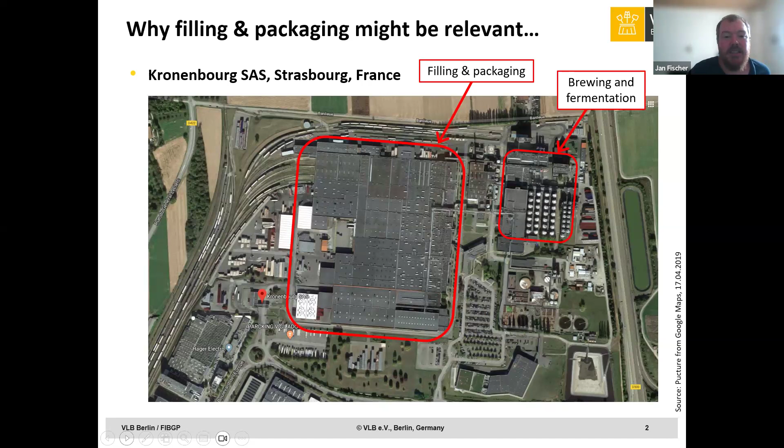Also, what we always say to make it more interesting for the brewer: filling and packaging is the part where you can screw up the beer, where you can turn a perfect brew from the brew house into a disgusting product. And this is, of course, something you should prevent. And this is why filling and packaging is also very relevant.

Okay, just some introduction. What is packaging? We have some definitions. So first of all, what is the function of packaging? Of course, the main point is that we have something to put the beverage in, something which encloses the beverage. This is the main function. But we also have some other very important functions of packaging.

For example, information, like legal information. What are the ingredients, the ABV, the alcohol, and maybe even things which are relevant for allergies and so on. This is also a very important function of the packaging.

Even some other things like gimmicks, some advertisement things. For example, I have these cans here of Coors Light, an American beer, where the mountain turns blue when it's cold enough to drink. If it's not cold, it is white. So you can even make some fun and some advertisement with the packaging.

So some other definitions: the packaging mean is the package itself, for example a bottle, a can, a keg, a cask, but also some secondary closures which don't really have product contact, such as a crate or cardboard boxes for six-pack trays and so on. This is the packaging mean.

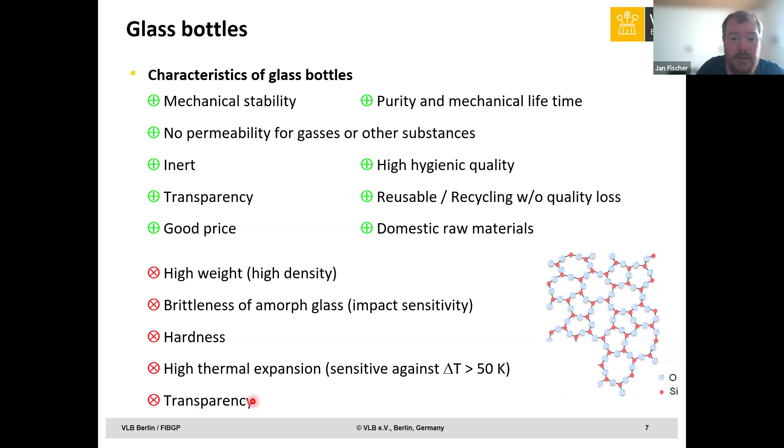Reusable, and recycling is possible if we don't refill them directly. They are cheap and can usually be made with domestic raw materials. However, they are heavy. They can break, since glass is very brittle. Then they are thermally sensitive to thermal shock: especially when cleaning and filling the bottle, we should avoid big temperature gaps. And transparency is good to see the product, but could also be bad, as we'll see later on.

I don't want to talk a lot about the manufacturing or the components of the glass, but just as information, most of it, like 2/3 or 3/4, is quartzite, so silicon oxide. Then we have sodium carbonate to reduce the melting temperature during manufacturing, and limestone to increase stability and durability. For the colors, we could use iron and sulfur for brown glass, chromium oxide for green, and cobalt for blue.

Here are the compositions of a glass bottle in weight percent, and as you see, most of that is quartz, silicon oxide.

Just quickly to the manufacturing of glass bottles. Basically, there are two main ways. The first one is the blow and blow process, an older process. The liquid glass gob goes into the mold, and then it is blown from the upside to get a pre-shape. Then the mold is turned, and afterwards it is blown from the top so the bottle gets its final shape. That's very simplified; I don't want to go deeply here.

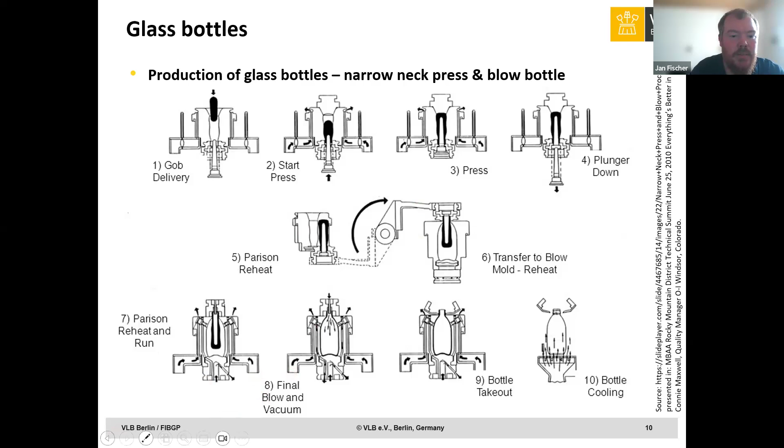So I press it inside with a mechanical thing, not by air, and then the rest of the process is the same. I turn it around and then blow it to the original shape. The main advantage of that narrow neck press and blow is that I have here in this part a much more even glass distribution.

As you see here, there are some gradients in the thickness of the glass, and this is then more likely to break. With this narrow neck press and blow, I can in the end have a smaller, thinner glass, and have some kind of lightweighting, so material optimization, and this was very important within the past years.

But the glass bottle is not only a glass bottle. We have some other things on it, and very important is the hot end coating and the cold end coating. The name comes from the container temperature while manufacturing them. For the hot end coating, the container still has a temperature of 500 to 700 centigrade, and the hot glass surface is vaporized with the fog of a metal.

For example, a tin coating or a titanium tetrachloride coating. This reduces the reactivity of the hot glass surfaces by creating a metal oxide layer. The thickness could be between 1 nanometer and 1 micrometer. Excessive coating is not very good; it can cause corrosion of crowns. I have a slide for this later.

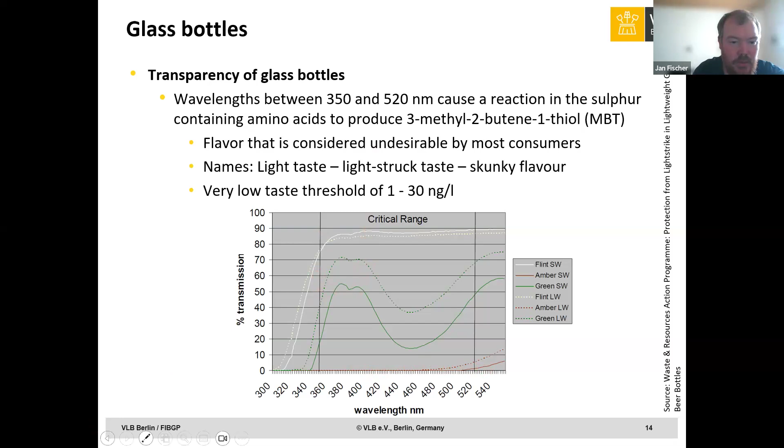If you see here, the amber, brown glass bottle does not let those light wavelengths inside the bottle, so that will not happen. But other bottles, such as white or green bottles, will allow that reaction. Brown bottles offer the highest protection, green bottles offer low protection, and transparent bottles offer almost no protection.

So if you ask yourself why there are still green and white bottles: first of all, if you are outside of Germany, you are not committed to the German purity law, so you can use special hops which prevent that reaction to some extent. And this is only possible if you have your own bottles, not pool bottles, so you can put UV blockers in the bottles to prevent that.

But if you have a pool bottle, like the returnable bottles every brewery uses, of course you should not use white bottles. Okay. It's interesting.

Can I ask you? It's interesting. Why don't you make a bottle that's completely black so you can't see anything inside? Why don't you do that?

Well, I think the coloring, for example for brown, was some iron, which is easily available and cheap. I think it maybe even exists completely black, but for this case it's not necessary. Of course, for marketing purposes, I can imagine a completely black bottle, but I think brown is totally sufficient to reduce this reaction, and it's easily available. We have a lot of brown bottles, and if you start now with a black bottle, it would be just for your brewery. But for marketing, maybe go for it.

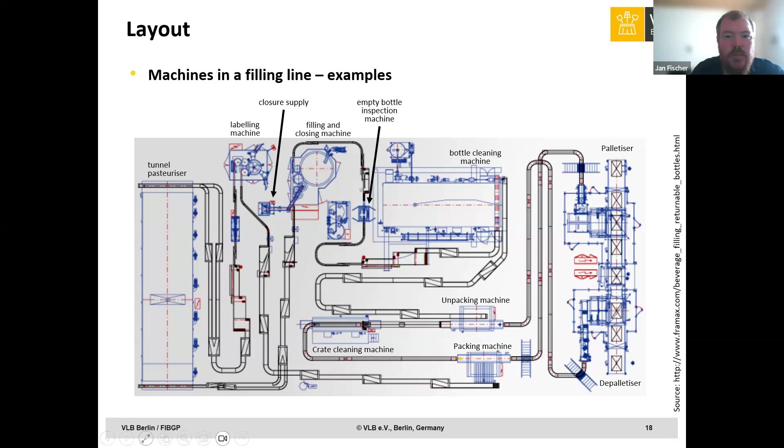So, I will now talk a bit more precisely about some of those machines. Okay, let's just start now with the transport.

This is like usually what you're having, the transportation of the bottles. I don't think I have to go into detail. You have those conveyor chains, and then of course you need an engine, a motor, and so on. You have the sidewalls, the guides, which are holding the bottles in the right position. Very important, what you cannot see here, usually you also have belt lubrication, where you put chemicals and water on those conveyors to have a frictionless transportation of the bottles.

So I already said that we have parts of the machine where the bottles are going in bulk transport, and also parts where the bottles are going in single file transport. For example, they enter the washing machine in bulk transport, but then for the inspection machine and the filling machine, they need to be in single file.

And it's nowadays standard that you have the separation process done pressure free. With that, Krones calls it a glide liner, though other companies have other words for that. You see here that when the bottles are in bulk transport, you need less speed of the conveyors to have the same amount of bottles than when it's single file. So I have increasing velocities of those conveyors, and this is how I achieve that pressure-free single file transport.

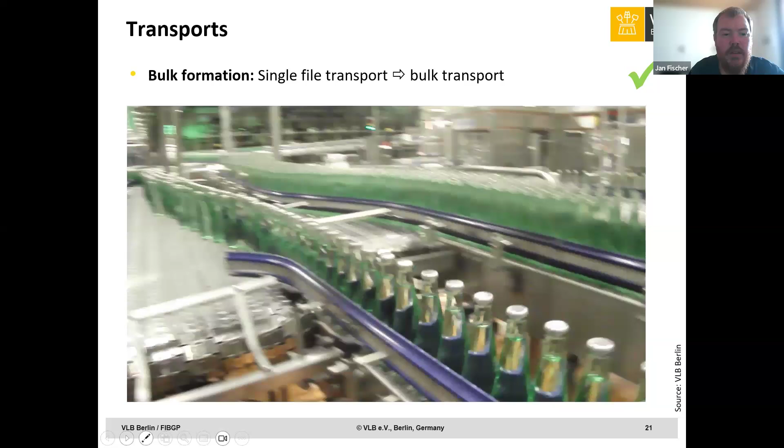Okay, now something about efficiency and output. If I have the filling machine, the filling machine is determining the output of the filling line. If I have a filling machine which, for example, fills 20,000 bottles per hour, the filling line produces 20,000 bottles per hour. We already talked briefly about all those machines. If these machines would run without a stop and all at the same speed, the full filling line would be full of bottles.

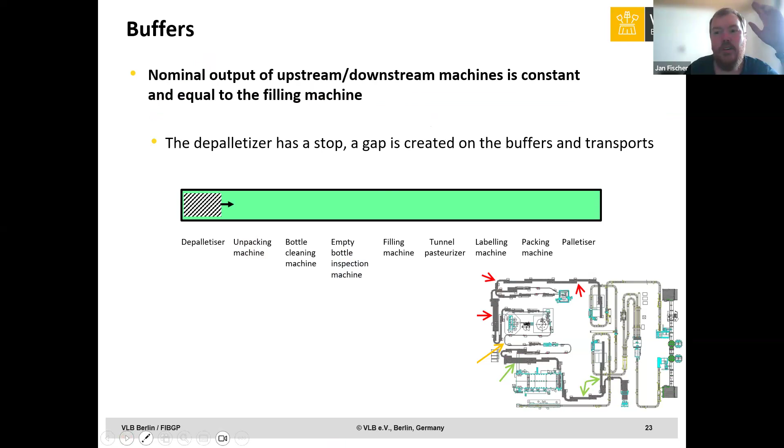So if I now have a stop at one machine - there are a lot of things turning, there's always some interference, there's always some stop. If I have a stop at the depalletizer, and we assume every machine runs at the same speed and is full of bottles, that stop will then go to the unpacking machine. Afterwards I would have a gap of bottles at the bottle cleaning machine, at the empty bottle inspection machine, and then at the filling machine. And if I have a gap of bottles at the filling machine, then I will not be able to fill my 20,000 bottles per hour. This is why the efficiency of the filling line goes down.

Afterwards, the stop or this gap goes to the other machines. This is why you get the output of your filling line according to that V diagram, also called a Berg diagram. The filling line is the leading machine.

Which runs with a nominal speed, in our example 20,000 bottles per hour. And then all machines, upstream or downstream, run with a higher nominal output, up to 150%, between 130 and 150%, for example at the depalletizer.

Through that extra higher output, in the same example, if there's a stop at the depalletizer, so I don't produce bottles there, but due to that higher output, I can, with each machine, reduce that gap of bottles. In the end, the filling machine won't see anything of that stop, because all machines are working faster. This way I'm still able to fill at 20,000 bottles per hour, so I don't have a stop, and my efficiency doesn't go down.

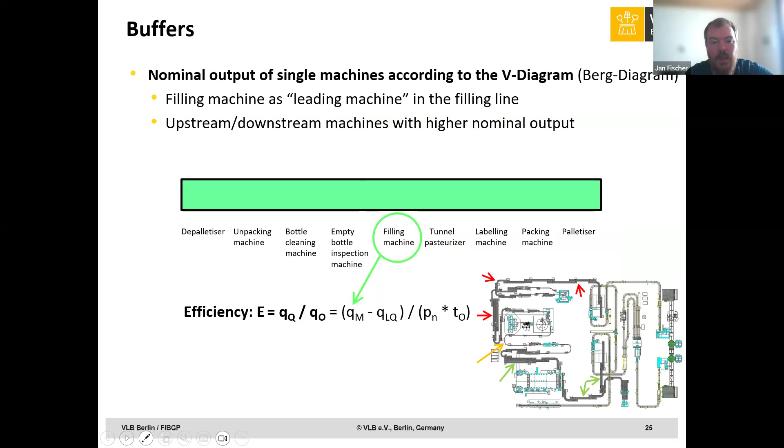So this is a very basic way of how filling lines produce. I have the filling line as the leading machine, which determines the output for the other machines.

To also achieve that the filling machine always runs, I need buffers. I have to ensure that the filling machine always has enough bottles to fill, and that there's always enough space to transport the filled bottles. So we have the anti-stau bottle buffers before the filling machine, and they are always filled because the machine always needs bottles. This is the anti-stau buffer.

Then the anti-block buffer is after the filling machine, and it should always be empty. If the anti-stau buffers are empty or the anti-block buffers are full, the filling machine has to stop, because it either doesn't have bottles or can't transport the bottles away. So these are the buffers. You see there's always some buffer space in those filling lines - here always filled, and here always empty, the anti-stau buffers.

Okay, then the first big machine, the bottle cleaning machine. Yes, of course very important for a returnable filling line.

Initial situations and aims of cleaning. We can imagine when the bottle comes in, we have product residues, we have some microorganisms inside, maybe even mold if it's been standing. The bottle still has labels, and if it has labels, it still has label glue. There can be foil inside, there can be dust inside, but there can be everything inside - like glass splinters, crown caps, cigarette stubs, and whatever. This is, of course, something which has to be removed from the bottle.

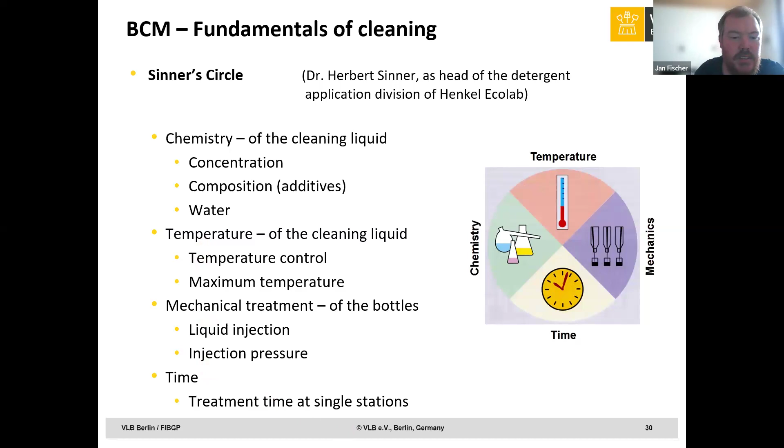There are some advantages and disadvantages. For example, the main advantage of the double-end machine is that you have a more hygienic way. The risk of recontamination is less because you don't have the dirty and the clean bottles on the same side. In some breweries, it's even made like that: the infeed of the bottles is at a different place of the building than the outlet. There's a wall, and then I can divide the dry part from the wet part of the filling. Very good.

However, they need more space. They are more expensive than the single-end machines. The entire treatment is also a bit longer. We have here 15 to 25 minutes and a soaking time in the main caustic of 10 minutes. And the single-end machines are more compact. So they don't need as much space, and have a short soaking time of 6 to 8 minutes, entire treatment 11 to 13 minutes. So also due to that compact design, I can work a bit faster with them.

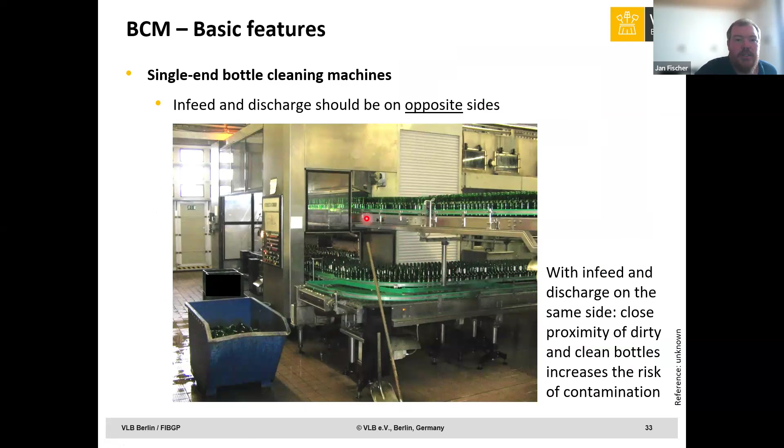But as said, there's a hygienic risk. So you really have to see that it's not so close. And also very important is that the dirty bottles are always down and the clean bottles are leaving the machine from the upside. Otherwise, of course, dirt could fall into the bottle. But if you have a good hygienic concept, of course, you can also work very well with single-end cleaning machines.

Inside the machine, the bottles are located in baskets, usually made of plastic, but there also exist some made of metal. Those baskets, with one bottle always inside, are on the conveyor. The baskets are important for the uptake and the transport, and also later for the release of the bottles. Also important is that the bottles are centered. You see here that the bottle opening, the bottle finish, is always centered in the middle of those conveyors. This is important for flushing and spraying, and also later for the label removal.

What's also important for those conveyors, for those baskets, is that I don't want a lot of caustic carryover, because this will increase the consumption if I carry caustic from one bath to the other bath with those layers. So this should be minimized. Also low heat capacity, because if they take and transport a lot of heat, this would also reduce my efficiency.

Okay, let's go now to the different steps of the bottle cleaning machine. We start here with number 1, the infeed. After the infeed, we have the pre-soaking bath number 1 and the pre-soaking bath number 2. The infeed, of course, is to get the bottles into the machine. The pre-soaking, the first step of the bottle cleaning machine, has 2 main effects. First of all, I already have some kind of cleaning; maybe some objects fall out and so on. But also very important is that I have a heating up of the bottles. The first is about 20 to 30 degrees, and the next one is up to 40 degrees. So I have a stepwise increase of the temperature, so that later when the bottles go to the 80-degree caustic, they don't have such a big temperature shock.

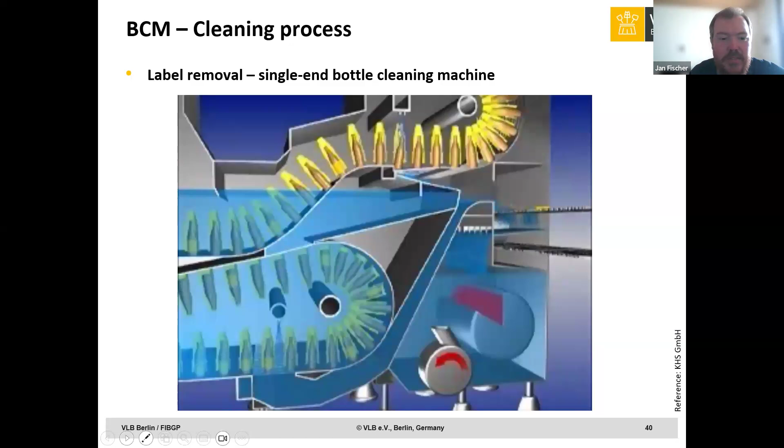Is there any circulation inside the bottles, or it's just soaking? Inside the bottles right now, no. This is just soaking. We have the circulation of the caustic due to the label removal and also for homogenization effects. But inside the bottle, in this moment they are just filled with the hot caustic. But we will have something later. Okay, and this is the heat exchanger, for example, to heat the caustic. So here we put the primary energy.

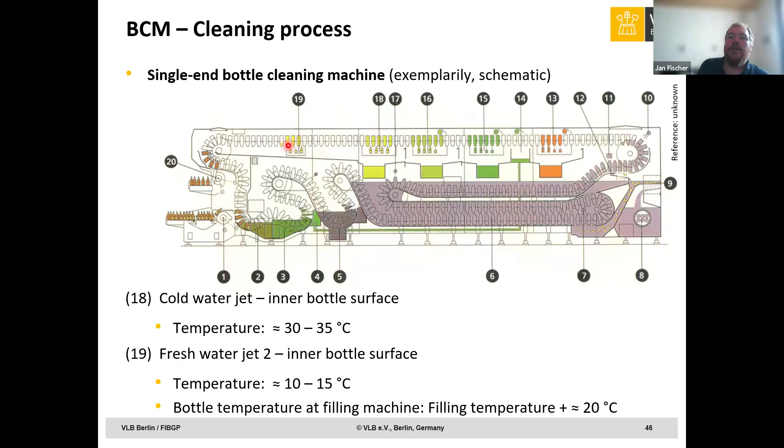The fresh water is very important because this water is the main thing to get out the chemicals, and then to bring the bottle to a temperature of 20 degrees when it reaches the filling machine, because I fill very cold, and if the bottle were too hot, I would have excessive bottle burst at the filling machine. Yes, and this water has to be of drinking water quality. Sometimes you can even add some disinfectants, such as chlorine dioxide and so on, but of course only in the amount that is within the legal regulations.

Okay. Then in the end, the bottle discharge, which is of course done with those machines which are putting the bottles from the conveyors into the baskets and vice versa.

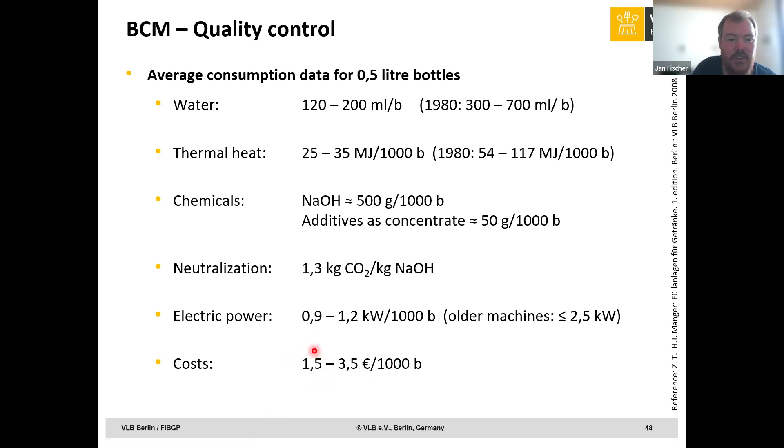You see here in the end it says 1.5 to 3.5 euros per 1,000 bottles. But I would not say that this is a number we can trust anymore, because we all know what happened within the last years: we had an explosion in thermal heat costs and also in caustic, which was increasing a lot. So we should maybe make new studies to present more recent data. But here it's still between 1.5 euros and 3.5 euros, still a big gap, but I think it's more like in this range now.

However, here are some things to be considered. Of course, you are quite limited in the output. If it's too fast, you don't see anything. Anyway, I think it's not state of the art now. Of course, the change interval for personnel is 20 to 30 minutes, if it's done right. I don't know if this is always taken into account when you are in a market where there is an inspector.

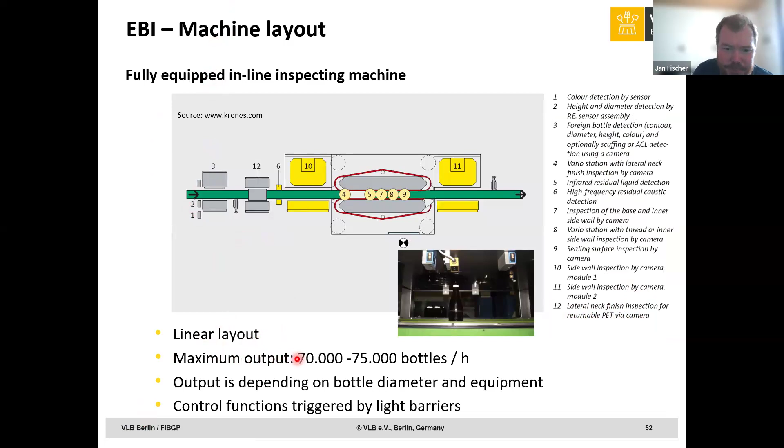You have inline full inspection machines. Here is a sketch of it, this is the linear layout in this case, and we have a maximum output of 70 to 75,000 bottles per hour. Here are some pictures of those machines from Krones and Heuft. These are, I think, now the world leading manufacturers of inspection machines.

And they have different functions. First of all, the contour and color detection. Normally these machines have different techniques. In one machine, we have different modules which are responsible for different tasks. For contour and color detection, a picture is made of the bottle, and then it's compared to a template to see if there's a difference. Or for color, they have a color scheme. If it's different, then a signal is sent to the machine that this bottle is not right.

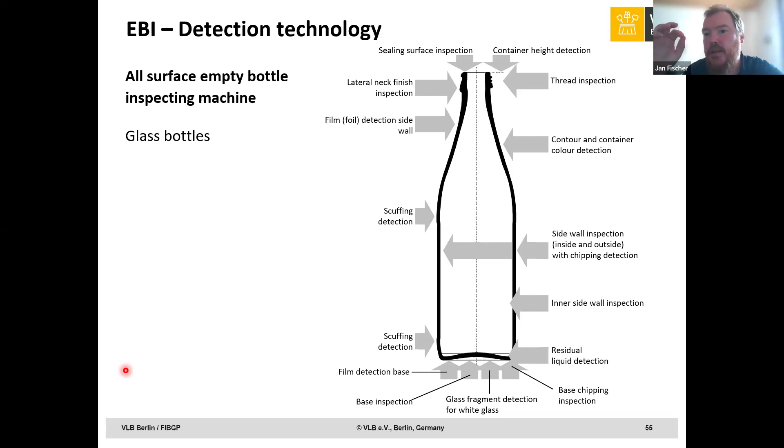So these machines can now find dirt the size of 1 by 1 millimeter, and still are able to separate it from a drop of water, which could also, of course, be on the bottle during production. So these machines are quite advanced nowadays. This works with CCD cameras with optical filters which take the pictures, and then they are compared to the template by the software, so we see where there might be things which don't belong on the bottle.

Bottle blower, yes. Before I inspect the bottle, I somehow have to clean the lubricant so that I have a proper view on the bottle. Okay. Yes, these were the empty bottle inspection machines.

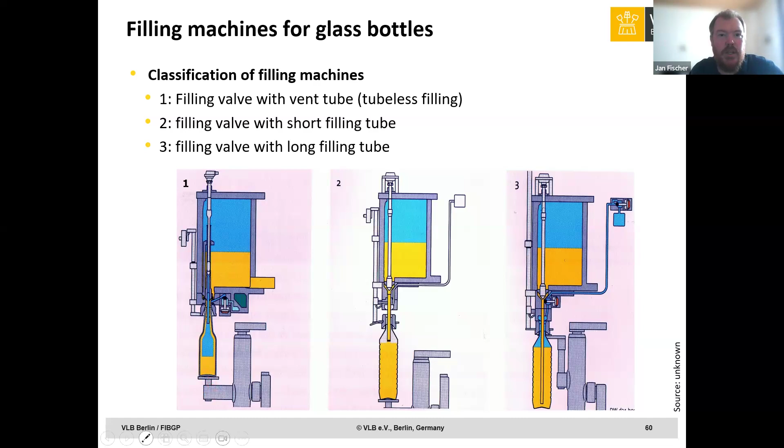Okay. Objectives of filling. What are the objectives of filling? I think most obvious is getting beer from the tank or wherever into a container, for example a bottle or a can. This is why we are doing all that stuff.

There are challenges. I have beer which is foaming, and I want to fill it very quickly. The filling process has to be done within a few seconds. This is why I have to fill with a pressure, to prevent foaming and to be able to fill that fast.

The filling pressure has to be slightly above the saturation pressure of the beverage, so 0.5 to 1.5 bar higher. The saturation pressure depends on the CO2 in the product. This is something I don't want to change, it's a product given. I want my beer with a certain amount of CO2.

But for example, the temperature I can change. This is why we fill with low temperature, because then the saturation pressure is low, and this is why we can have the lower filling pressure.

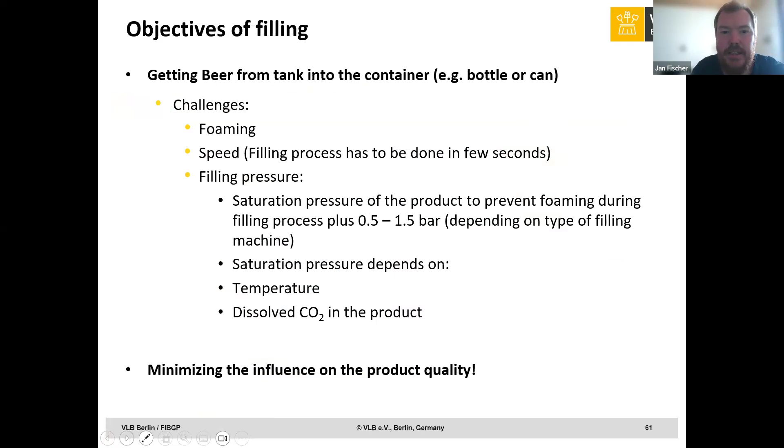Also, one very important objective of filling is to minimize the influence on the product quality. Maybe you already know the main influence on product quality - of course, it is oxygen. We'll talk about this more later, but it's one of the most important things with filling. After getting the beer into the bottle, the goal is getting the beer into the bottle with a low oxygen uptake.

Afterwards, there's a pressurization - I put the bottle into the filling pressure, which is slightly above the saturation pressure, and then I have my filling phase. After filling, I have the pressure release, and afterwards the bottles are going out, and I can crown and have the bottled beer.

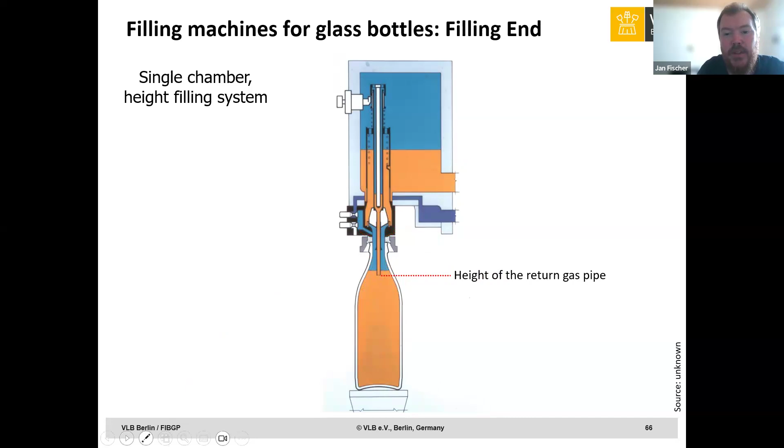And the gas is pushed back into here. The height of that return gas pipe, where the air is pushed back, is very important, because this is also here the filling end. When some level is reached here, which is determined there, that determines the end of the filling. So, the final filling height is defined by the height of the return gas pipe.

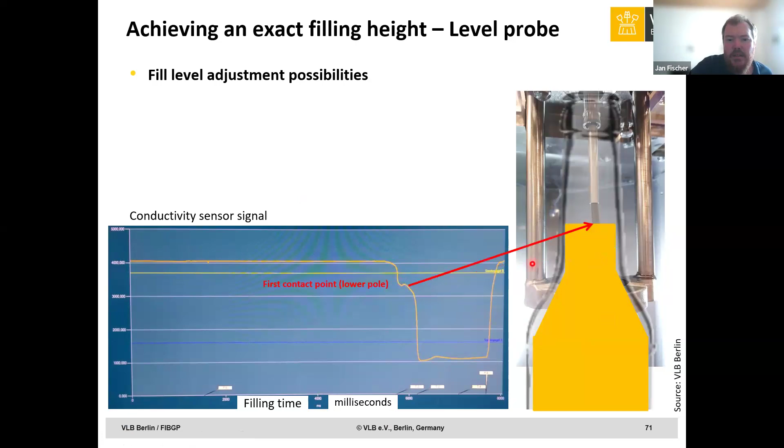Once this point is reached, the beer is here, we have the conductivity going down. We have a small shortcut, and then here nothing changed because we have some insulation material. But in the end, when we reach this, we know we are at the very end, and we stop the filling process. With these steps, we can adjust the filling height.

So the filling process we know, and now it's almost the end. Usually the filling speed is slowed down a bit, and afterwards we have those things, and with that we can handle and steer the filled height. This is the height filling machine.

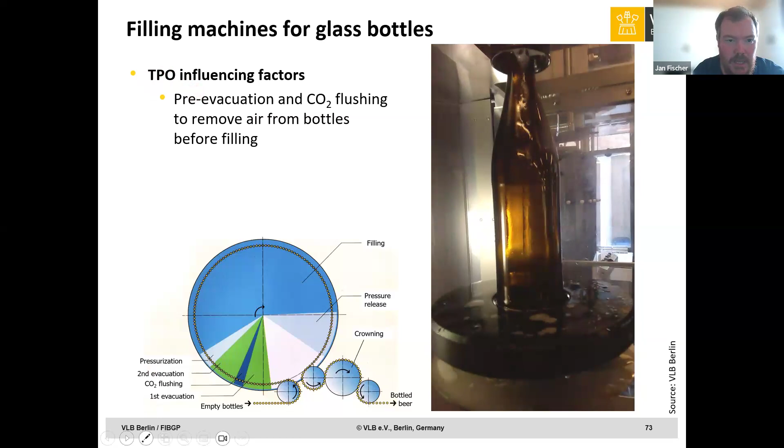Here it already says TPO influencing factor. TPO means total package oxygen, and this is the most important factor concerning oxygen in this case. So oxygen, and especially the TPO, the influence of oxygen in bottled beer. Oxygen, of course, reduces the shelf life, leads to off flavors and color change, and so on. Some other teacher already told you that.

And the TPO, that total package oxygen, is actually the sum of the oxygen load of the beer at the filler inlet - maybe the oxygen that comes in with filtration and so on - and then the oxygen uptake during filling, and the remaining oxygen in the headspace of the bottle.

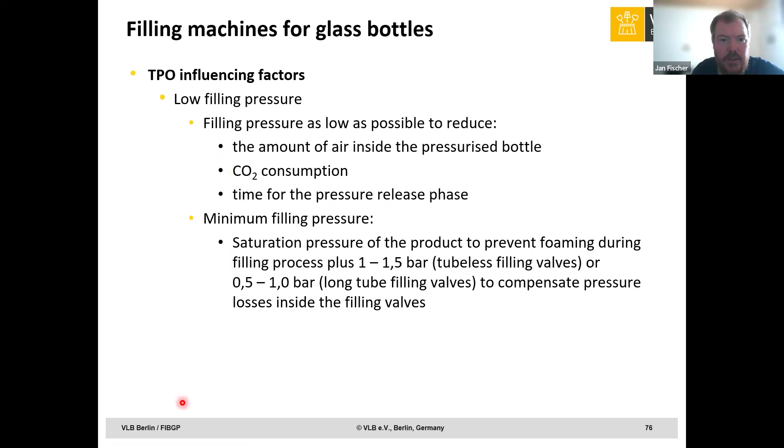So low filling pressure, as low as possible, yes, because of the amount of air inside the pressurized bottle, CO2 consumption, and the time for the pressure release phase. Minimum filling pressure, we were talking about it.

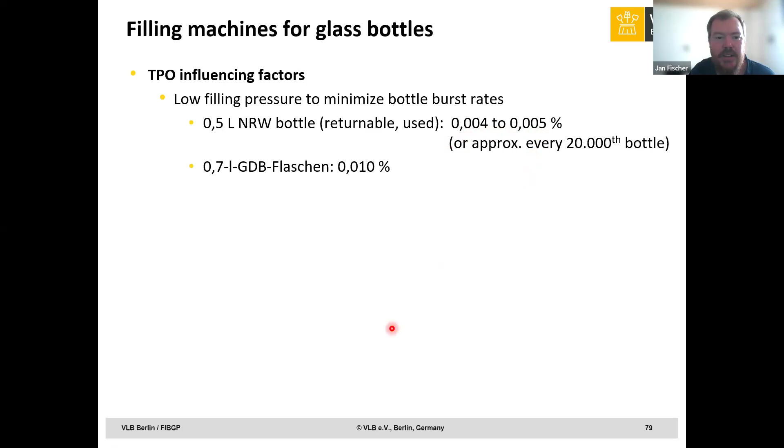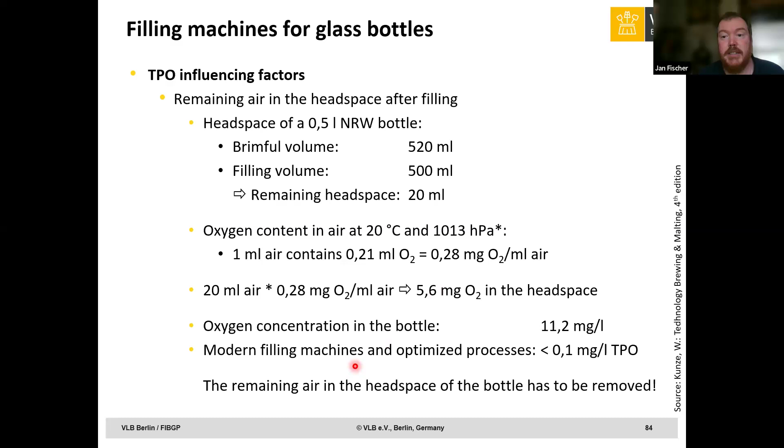And when we said we are at around 0.1 milligrams per liter, which is achievable nowadays, we are then a factor 100 more than required, meaning the remaining air in the headspace of the bottle has to be removed. And this we do with the high pressure injection. This is, as I said, one of the most important gadgets. And we see it here. This is a high pressure injection.

We are jetting sterile and oxygen-free water inside the bottle. Sterile and oxygen-free by means of just heating it. So we put the hot water, around 80 degrees, in the bottle, and due to that we create an overfoaming of the bottle, and therefore the oxygen is pushed out, and then we have to cap, of course, at the right moment. You see here a small head, like a cap of foam, and then we put the crown on, and therefore we can push out the air in the headspace.

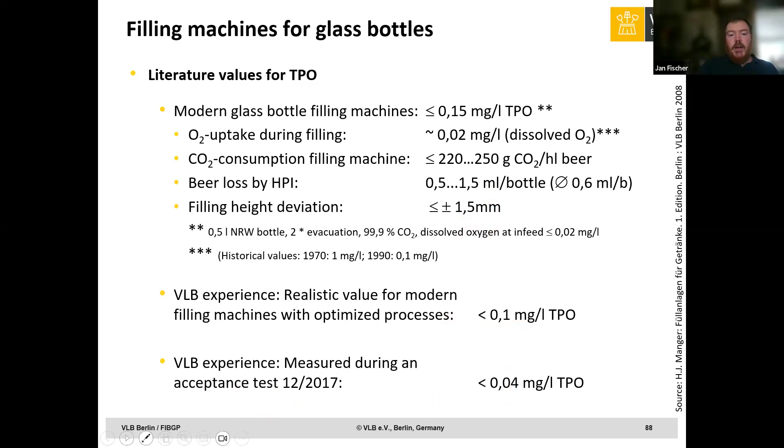What we say is realistic is under 100 ppb, but we already saw, for example in an acceptance test, that we can have values below 40 ppb. Very important to control the TPO is that you measure it right. I think even the smallest brewery should be able to measure the TPO in their products. There are machines especially for that, for example from Anton Paar, the TPO 5000, which costs more than 50,000 euros. Of course, this is not acceptable for everybody.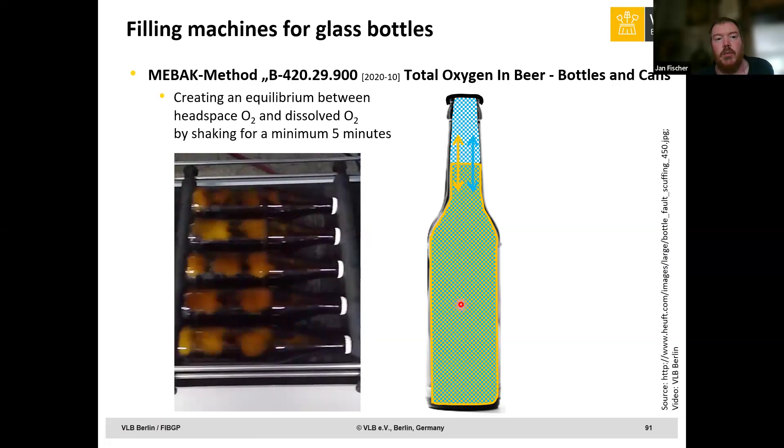That was not removed properly by the HPI. What we are now doing, we are shaking the bottles and then achieving an equilibrium between those things. So the oxygen in the headspace and the dissolved oxygen are getting into equilibrium. You see here, we shake before for 5 minutes.

And to now calculate the TPO, what do we need? We need now the oxygen dissolved in the beverage that we can measure with a Haffmans, with the machine if we have that piercing device. What we also need is the temperature of the beverage. It's given in the measurement devices usually, the filling volume, and the headspace volume. And these are some things we can find out by metering, for example, by just weighing the bottle and then calculate by the density.

And then we need the ratio between the filling volume and the headspace. And then with this information, we can calculate the factor Z. And the factor Z we multiply with the oxygen we measured, and this is how we can get the TPO. Okay, so we have to shake the bottle, measure the oxygen, and then make those calculations.

Here are some stepwise SOPs, some stepwise instructions how to make it. For example, we have it here for glass bottles, for cans, and also for swing top bottles. I think we don't have to now go through everything in detail, but this is for you. You have all those things if you want to know how to make it properly.

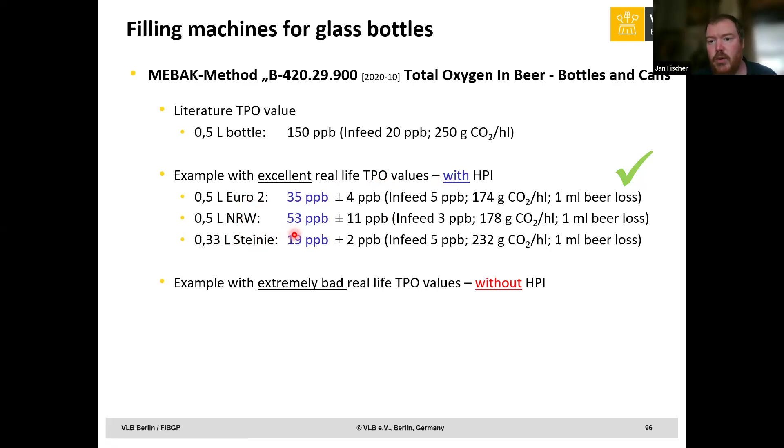We have here, I think, the last year that we did it, we made some research, some investigations, and had here some values we found out with excellent real life TPO values with an HPI, and here are some bottle types. And then we were here between 50 and 20 ppb, very good, very much below that 100 we are saying. And then for some other things, we checked the values without using the HPI. And you see here, we were like factor 1000 without that HPI.

So seeing it is 1000, no, 200, doesn't matter. Much higher without the HPI. So it is very crucial to have the HPI when filling bottles.

Okay, now we had the glass bottle filling machines, and now we are leaving that machine and the next machine right next to it is a closing machine.

So usually blocked. We saw that already, that they have to be quite close to the filling machine, because we want to use that over-foaming and have to close them.

Just some words now to the crown corks. Usually nowadays we have here some coating, for example, chromium oxide steel. Thickness: we are going now to somehow reduce the weight. So nowadays we can see there is that standard of 0.235 millimeters of thickness. We have a lacquering, we have a printing, and we have that compound.

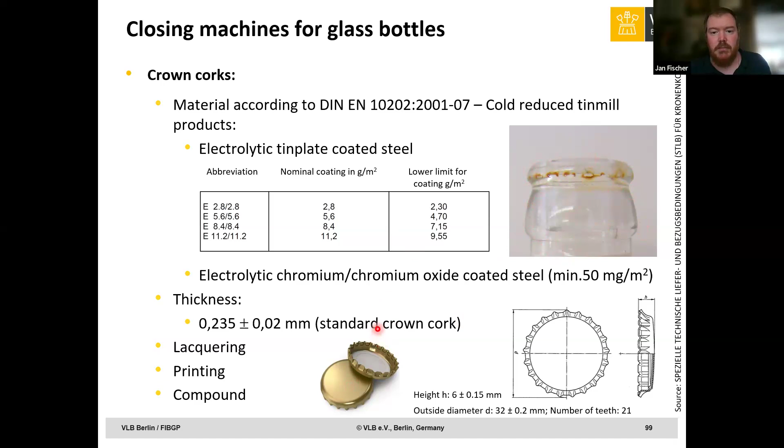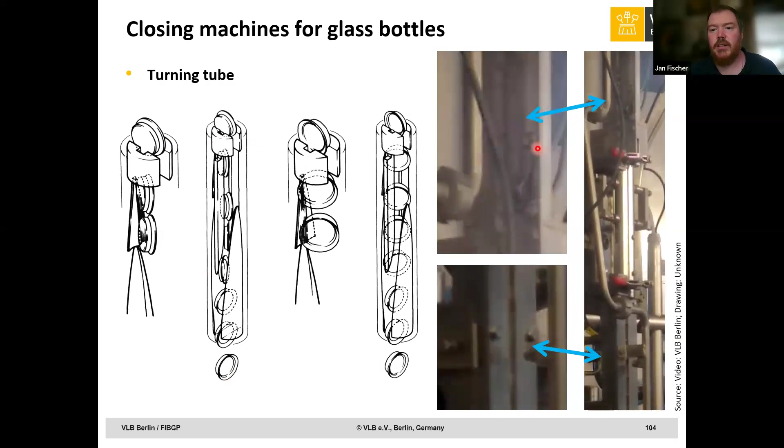So anyway, it is just mechanical. You see here those slots, and then the crown falls, and however it comes here, it has to be turned, and in the end, doesn't matter which side it comes from, it makes a turn and will always be in the right direction. It's not easy to see in those videos, but I think you can imagine that it's done mechanically so that the crowns are all in the right direction.

Yeah. It's not rocket science. Actually, it's a machine like, yes, you can imagine it. I don't know if you know those hand corkers, and it's basically the same.

Okay, here you see, it's easy to imagine, I think, the preload of the crown corking, and then we have that closing ring with a defined diameter, also according to the bottle and the crown itself, but usually it's standardized so that you have all the same diameters. And of course, you need a special force, somewhere between 1.8 and 2.5 kN, so that it is tight enough but not too tight, because if something is too tight, then it is destroying.

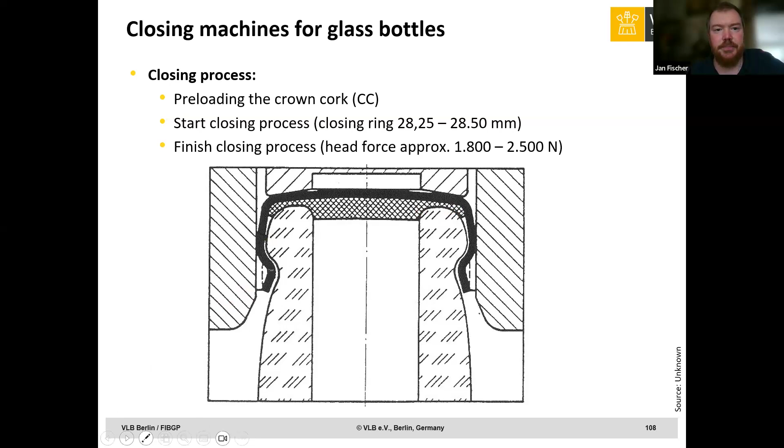Yes, then next thing is the bottle shower and drying stations. You remember those videos with the HPI, the foaming of the bottles? Of course, the bottles then are full of beer on the outside. This has to be removed. And then afterwards it is removed, and then usually you have a bottle dryer also, so that the bottles are afterwards dried, maybe in this case to be able to be labeled if there's no pasteurizer in between here. But it's a very simple machine, that bottle shower.

Actually, we have a lot of similarities, but also some differences when comparing the canning and the bottling. Usually the can lines are not more simple, but more compact. Just imagine you don't need that big bottle cleaning machine. You don't have a lot of transport of empty bottles in crates. So this is why they can often be more compact with fewer machines. However, they can have much higher output.

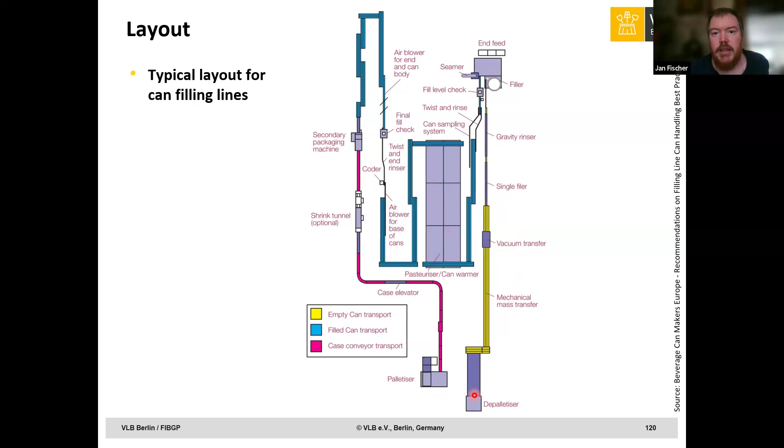What is very often the case is that we have two height levels in the can filling line. We will see this case later. Until here is on a higher level than the filler. This has different reasons. Starting with the depalletizer, you see here the pallet of cans is very highly packed. So usually when I depalletize them, I think we have a video of it.

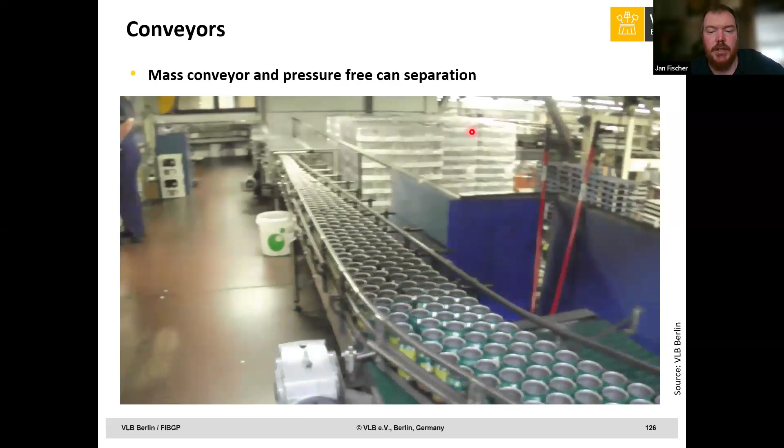Of course, they are not as heavy, we don't need so much force, but we should by any means avoid massive denting of the cans, because this could later lead to corrosion because of material cracks and so on. Okay, but you see the pallets of cans are quite high, and then they come on that high level from the depalletizer and go from bulk transport into single transport with that separation.

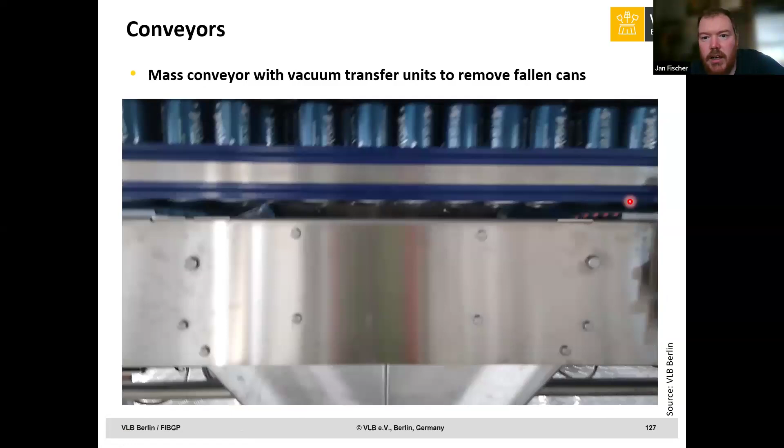Then we had also in that sketch a vacuum transfer. So here the cans are not transferred with a conveyor, they are transferred by vacuum on the upside. You see, they are somehow not flying, but there's a vacuum, and they are transported until they are getting down here again. For a small moment, they are transported like this.

And you see here, I don't know if you see down. Here they are lifting up, and then here's a vacuum transport, and down after the vacuum transport, you see here that bin. If I have a fallen can on the line, it would not be lifted up, so it will fall down. This machine is therefore to remove the cans which were falling, so that I don't have interference with cans which are falling down. This is made by this vacuum transport, which is usually in each canning line.

Then the can inspection machine. Of course it's not like with an empty bottle inspection machine for returnable bottles, where we have very dirty bottles and can expect everything. We have the cans coming from the manufacturer, and they already have some inspection machines. However, there are also some inspection machines for cans.

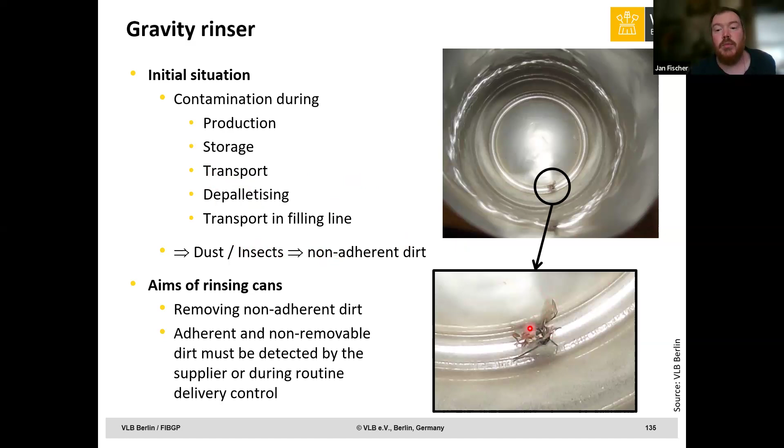So then the rinser. As I already said, the cans come from the supplier more or less clean. It's not like a dirty bottle coming from the customer. However, due to production, storage, transport, depalletizing, and transport in the filling line, we could have some contaminations. We don't talk about adherent dirt. We talk, for example, about dust, or in this case here, some insects. And this should be removed from the can.

And of course, we don't do that like a bottle cleaning machine. Therefore, we have a rinsing machine. The aim of rinsing cans is to remove the non-adherent dirt. Adherent and non-removable dirt must be detected in the manufacturing by the supplier of the cans. This is not the responsibility of the brewery. We call those gravity rinsers, and you see we have here one level, and here we go to the ground level, and this is the rinsing where we are cleaning the cans.

You see here, these are those twisters. Imagine the can goes into these things, like a roller coaster or those things for astronauts, where the can is rotated in the beginning to 135 degrees, and then has a drop angle of 35 degrees. So we have some cleaning effect due to gravity. Some of the dirt would already be falling down.

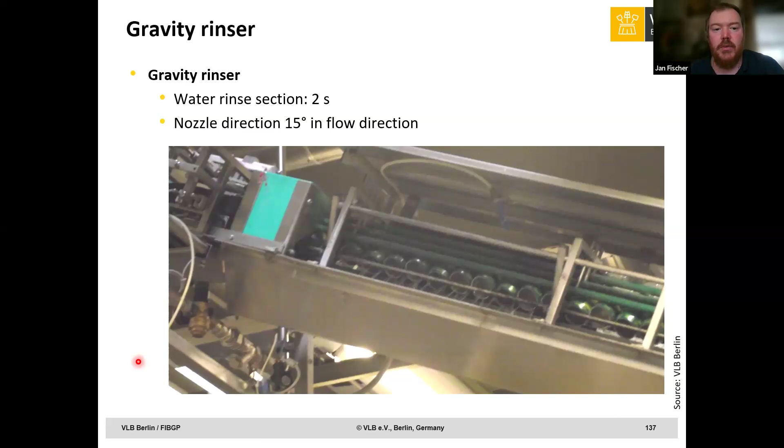However, this thing is also called a rinser because we are rinsing. So we put water there, for example in water rinse sections. For 2 seconds, we are rinsing the cans with water. The water should, of course, be of good quality. Usually you should use degassed water, but you can also add some disinfectants like chlorine dioxide. However, normally you pasteurize the can afterwards, so micro is not a big issue in this case.

Then we have the rinse discharge. We had first 135 degrees, and then plus 225 is 360. We then have the full inversion. The can is turned, and then is in the right direction and can enter the filling machine.

Can filling machines. So again, on the classification of the filling machines, I think I already told you about the cans. We cannot use the height level filling machines as with the bottles because of the big diameter. This is why we have either a metering filling machine or a flow meter filling machine with the cans.

There are other things. Nan, you can ask, please. I have building work going on, so I'm not so sure.

So, if you rinse the cans and there's any water left in them before you fill them, won't that water be fully saturated with oxygen and cause oxygen pickup? Actually, first of all, of course you would want to have as few water residues as possible. And second, you can, for example, use degassed water. This is how we are doing it. For rinsing, you need deaerated water. But as soon as deaerated water meets air, it will be fully saturated with oxygen, right? Yeah.

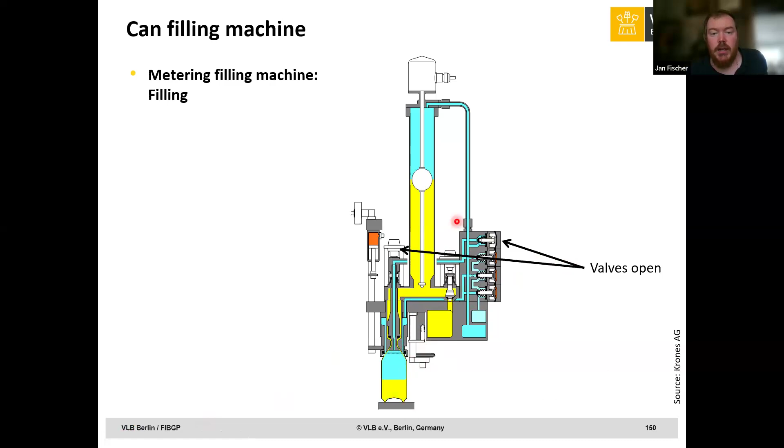So then pressurization - we close that way so the CO2 can go... we have the pressurization, and then we have the filling. Here the CO2 goes back, and then you see that swimmer in that metering chamber goes down until a certain level is reached, and then afterwards we have both - we have a pressure relief, and during the pressure relief that chamber is filled again with beer to prepare for the next step of can filling, for the next can, and we have that pressure release.

So this is basically the main difference from bottles - that height level I have here with that metering chamber. As I said, there is also the way to make it with an IDM, with, for example in this case, a flow meter that can be a mass flow meter, which is I think more precise, but usually you have those IDMs to measure the flow by electric conductivity, and then you know exactly what comes down and what flows out, and then you could stop the filling process when it's about time. The other steps are the same: flushing to the ambient, flushing back, then pressurization, filling, and pressure relief.

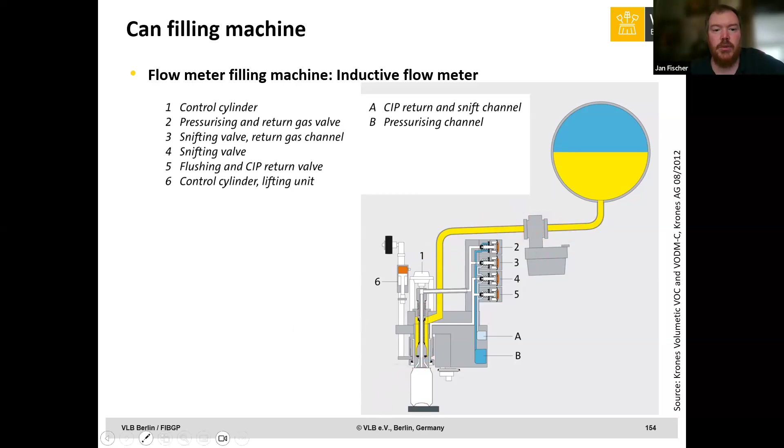Okay, O2 uptake - talking about that, we have O2 uptake again due to the filling process, like when we transport to the seamer. Of course we have initial oxygen load, and we have removing air in the headspace, CO2 rinsing before filling here. We need enough pressure to reach the can bottom - yes, so we have to have a certain pressure. However, excessive pressure leads to CO2 loss with mixing of air, and we then can put air inside the can. So we have to make that quite precise, and as long as necessary we should decrease the movement of air.

One disadvantage is that we cannot evacuate, and another is that we cannot use an HPI, also because of that big issue with overfoaming, we would have an excessive loss of beer and lead to underfilled cans. So we need other things to take care of this, and therefore we have a bubble breaker and sublid gassing stations.

You see here, I said it could be quite long. We have the cans, open cans, between the filling machine and then the closer, the seamer. And if you see here now, the foam comes out. This foam is, I think, very coarse, and it's really acting almost like a sponge for taking air from the ambient. But that means also, if you would remove here the first layer of that foam just before closing, you would remove most of the air from the headspace, because the air is in that first layer, in that foam, in the bubbles. Most of the headspace air is inside there.

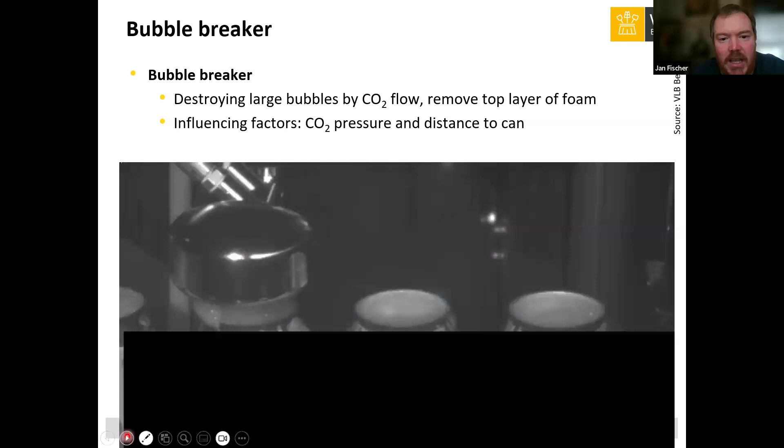I think here's another example of this. You see, but I think it's coming horizontally, and then together with the movement of the cans, it works to have that effect. But I think you see here, so actually, it's a spraying of that CO2, which is then here very... I think this is a very good example of how it's done, that the top layer is removed.

And the bubble breaker, and then we have another thing, which is in the seamer. First of all, here we don't have the crown supply like before. We have the can lids coming all in the back in a big roll, which already have the right direction, so there's no correction necessary in this case. So we have the infeed here, and you see now we have these different stations, where the open cans are, here are the lids, which are delivered to this station, and here where the lid is put on, we also have a rotating star wheel, we have that static CO2 channel here, and then the CO2 channel inside the rotating star wheel.

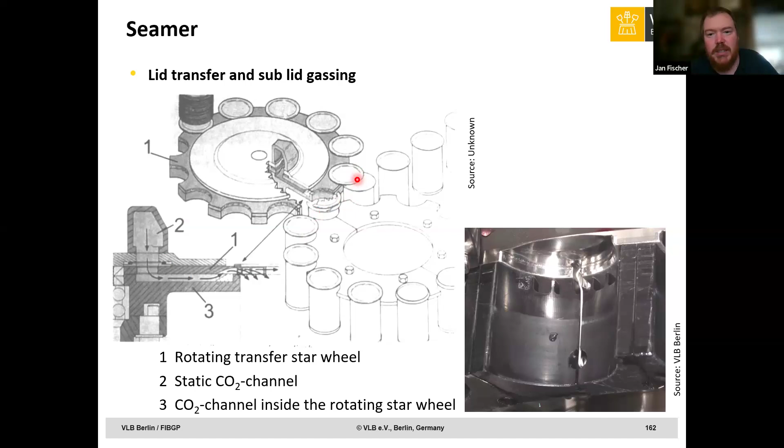So in the end, this is called sublid gassing, meaning that in the moment we are putting the lid on the can, we are blowing CO2 under or between the lid and the can. I think it's a bit hard to see in this video, and it's hard to find a clearer example, because of course you cannot see CO2. In this case, you don't have bubbles anymore, but here you see the rotating process while seaming, and somewhere here must be that sublid gassing where we are blowing CO2. Actually, it doesn't have to be CO2 in this case. For example, in our can filler, I think we use nitrogen. It has the same effect, and usually nitrogen is a bit cheaper, and you can have a nitrogen generator using the ambient air. So this can also be done with nitrogen.

Okay, now the TPO of cans.

Critical value, I don't know, it says here 1000 ppb, 1 milligram per liter. According to our experience, this cannot be an acceptable limit. I think we are here with 0.25 milligrams per liter, so 250 ppb. This is something which should be your threshold, your benchmark.

If you want to go way lower than 0.25 milligrams, so 250 ppb, it leads to excessive CO2 consumption. There's this one point where you then just need more and more CO2. This is more or less the only thing you can optimize, and then it doesn't make sense anymore.

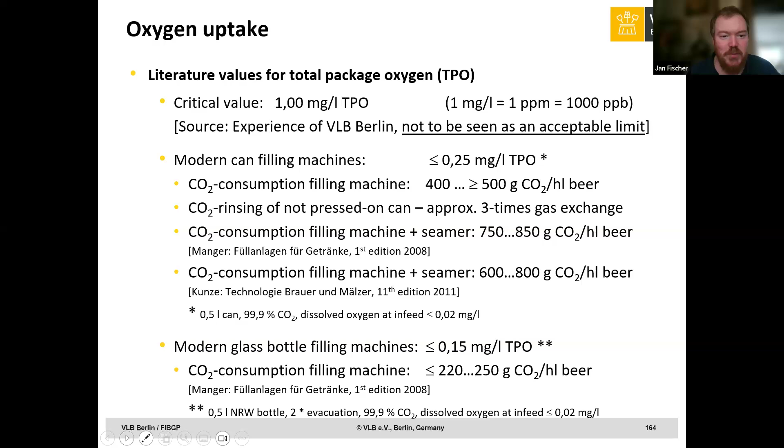Okay. Also, even when filling - I don't know if it's interesting for you - but for example when filling water, like bubble-free water and so on, you can also use sterile air. But you wanted to make beer, and then please don't use air for anything.

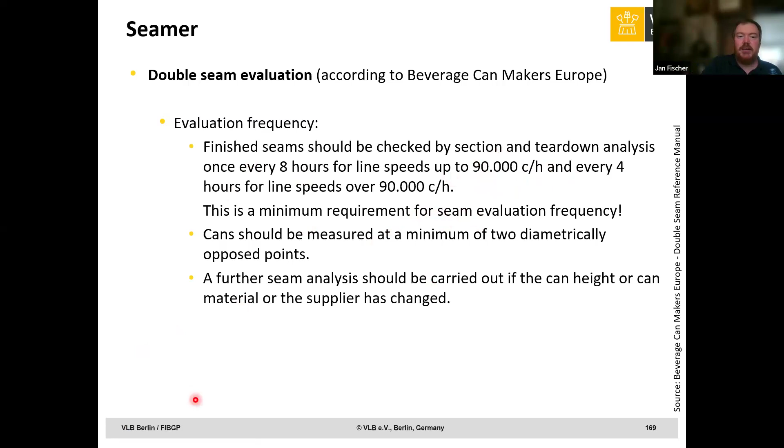And if that overlapping area is within certain specifications, you know that you have a good seaming. You won't have any problems with untightness or something like this. And of course, there is software that just says yes or no and calculates all the seams.

This is actually a returnable bottle, and then of course we have systems for every requirement, every need, to clean those bottles. Here, for example, it's a mix between a normal dishwasher at home and the industrial bottle cleaning machine. It's specialized for those bottles, where we can put up to 400 bottles. And the steps are more or less comparable to the ones of the big machines.

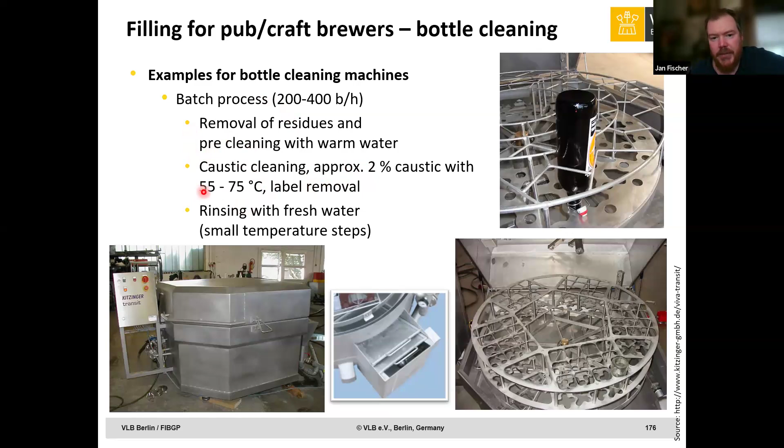Removal of residues, pre-cleaning with warm water, and then we clean also with 2% caustic, have a label removal at 55 to 75 degrees, and then rinsing with fresh water in decreasing temperature steps. There are, of course, different ways to clean your bottles.

You see that these machines are often used in companies making mineral water, and then there is a second machine for acid, because the minerals will form something which is not removable with caustic. So if the empty bottle inspection machine detects something like this, they are sent to that machine which works with acid instead of caustic. But just a side fact.

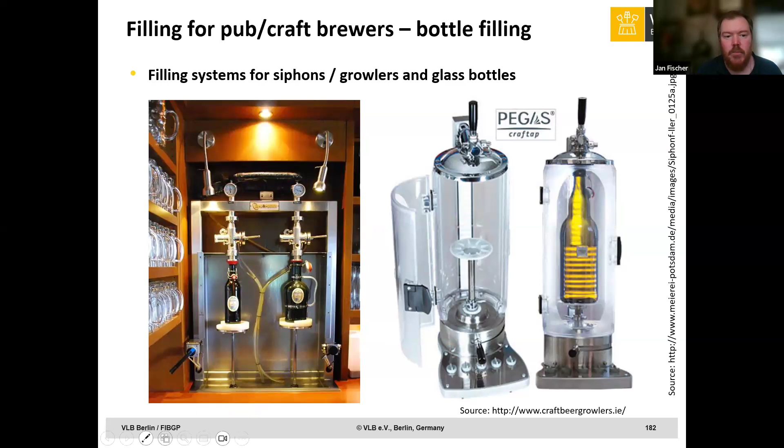Yes, there are, of course, different systems you can use. This looks a bit adventurous at first, but I think it would work perfectly for its purpose. A filling system for siphons, growlers, glass bottles, even those 5-liter things. You have here devices where you can put the bottle, set it to a certain height, and connect it here with those things to tighten it.

You have here something like a ring vessel where you have the beer, where you have the CO2, you have pressure, you can pressurize. I don't know, maybe there were valves where you can even make, okay, not vacuum, you would need a vacuum pump, but maybe some rinsing. So it actually works quite well, and I think there are several manufacturers which have systems to fill the bottle.

In Eastern Europe, they like to use their plastic bottles, and after the night in the bar they like to take something home. I think for one day, maybe the next day, it can still work out. So just like here for the tap, for the dispensing device, something where you can put the bottles, fill them, and bring them home. Yes, it all works.

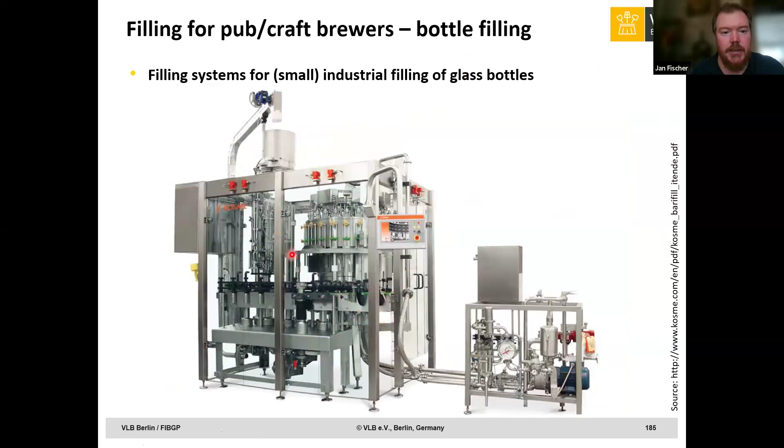But here we go a bit more advanced. For example, here there are more machines, a filling system for small industrial filling of glass bottles. You see here, this is a filling carousel. Here the closing machine. This was made for us when our can filler was not there, but we already had a seamer. So we were tapping the beer with a dispensing machine, and then we see our standalone seamer.

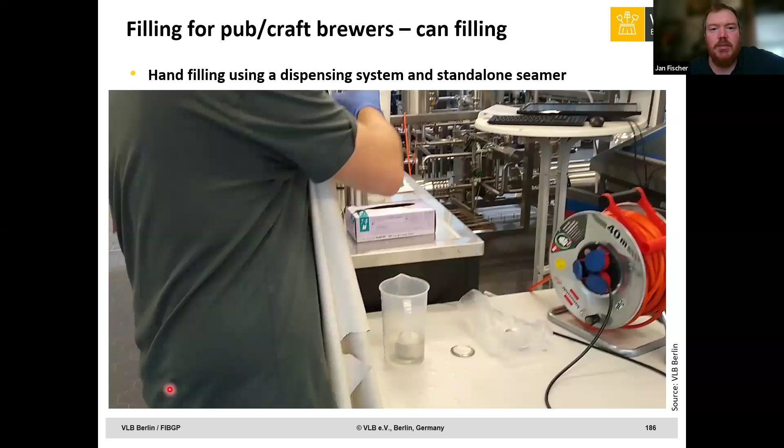Yes, I remember that during the pandemic, there were some bars who also had that machine where they could close a can, and then were selling beer cans like this for immediate consumption. But here, no bubble breaker, no gas stations, just for immediate drinking. Now it's seamed, and then you can have it for quick consumption.

But here, as I said, the big companies, Innofill, KHS, are of course also now aiming for the smaller market, but 1,000 to 540 is not really small. This is already industrial scale, but there are also some smaller machines made by the big suppliers such as Krones, Sidel, KHS. Craft-made can filler, perfection in small size, 4,800 to 15,000 cans. And here are some advertisements in American beer magazines.

But here I think this is really a small can line. We have the can depalletizer, the rinser, the filler, the seamer, and it looks quite professional. Unfortunately, I never saw that in real life. Different speeds, 35 or 65 cans per minute. So times 60. It's a can filling line for a small scale.

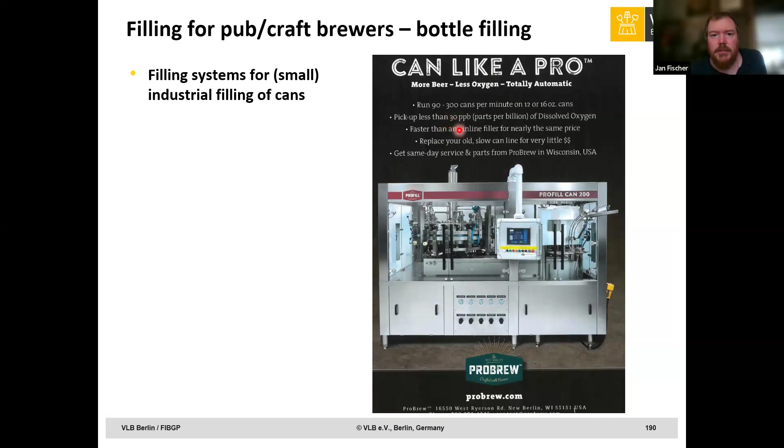Here also 90 to 300 cans per minute, pickup less than 30 ppb of dissolved oxygen, but that's just the pickup, not the headspace. You see that they are advertising can filling lines for 1,200 cans. Okay, maybe later some more, but we don't have so much time anymore.

Just about pasteurization and thermal, microbiological stabilization. We have some methods for improving the microbiological stability using thermal methods: the tunnel pasteurizer, the flash pasteurizer, hot filling, and then we have sterile filtration, and some other high pressure things. Let's say for beer, we usually have the tunnel pasteurizer and the flash pasteurizer.

Hot filling is not possible because, as we were talking about the filling pressure, if I fill very hot at a temperature which reduces the germs, for example 60 degrees, the filling pressure would have to be so high that it would not work out. Sterile filtration, I know one big brewery in Germany who does that, but usually you use a tunnel pasteurizer or flash pasteurizer.

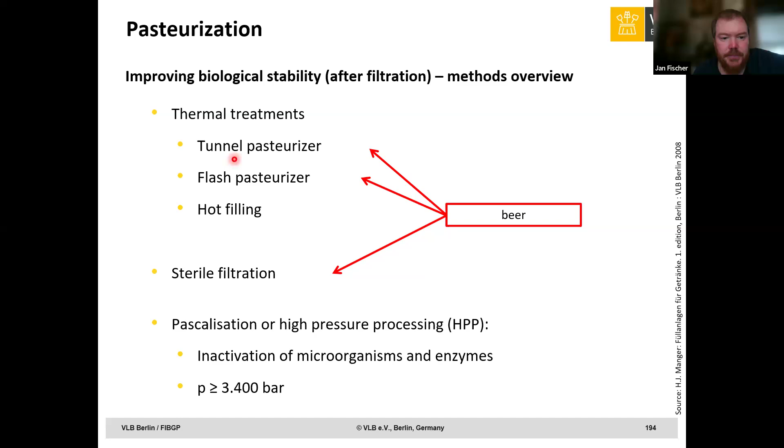Okay, the aim of thermal pasteurization is of course to reduce the germs, but I'm just aiming at the product-spoiling microorganisms. So it's not a sterilization. I don't kill everything, I just kill what is necessary to kill, and therefore I want to have no influence or minimum influence on sensory properties, and also of course I want to have low energy consumption.

I should be low in the TPO, because due to that pasteurization I catalyze my oxidation processes. And I need a certain headspace, we had it in the beginning, due to volume expansion, and no pathogenic microorganisms should be able to grow. Otherwise I would then have, of course, different requirements.

Okay, when I pasteurize, I usually have as a measure the pasteurization units, and each beverage or even each beer type usually needs special pasteurization units. So it's like the intensity of the pasteurization, and what you need is defined by the beverage, by the initial bacteria count, and also the heat resistance of the relevant microorganisms.

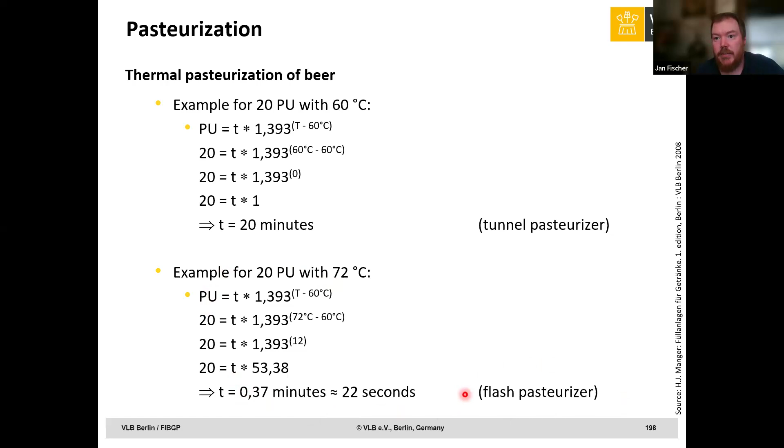Just the comparison of the tunnel or chamber pasteurizer and the flash pasteurizer. I think the advantages of the one are the disadvantages of the other. The main advantage of the tunnel pasteurizer, the chamber pasteurizer, is that I pasteurize the filled beer in a can or in a bottle, and therefore I pasteurize also the packaging material, and it's closed. There is no recontamination possible, so it's a safer method. With the flash pasteurizer, recontamination is possible. It's only possible when I have a really safe and clean environment.

Usually in Germany we use the flash pasteurizer when we use returnable bottles, because we know that they are very clean, coming not sterile but more or less sterile from the bottle cleaning machine. When we are filling cans, we usually use the tunnel or chamber pasteurizer. But of course, the tunnel pasteurizer is a very big machine, investment costs, you need space, and you have higher thermal consumption and a higher thermal load for the product.

The flash pasteurizer is basically a heat exchanger, nothing else. It does need energy, yes, but it doesn't need space. It's more or less an inline thing, yeah. And we have also low thermal influence on the product.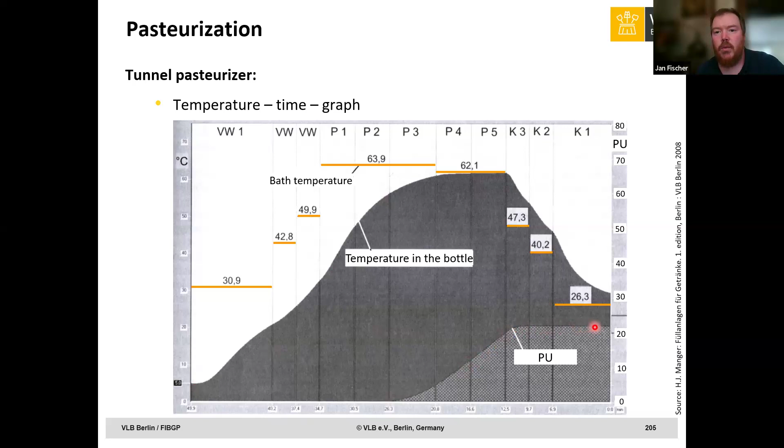Here you now see the warm water. Actually, this is the temperature inside the water baths. Yes, warm water, pasteurization, cold water, as shown. And here you see the temperature in the bottle. And of course, it's a bit delayed. However, we then reach the pasteurization temperature. And in this case, when it reaches 60 degrees, we start to count the pasteurization units until here, and then the pasteurization units are calculated, and then we know that we have a stable product.

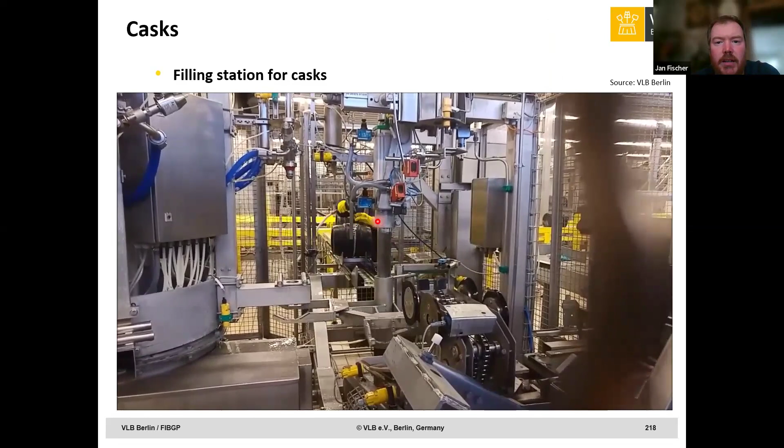Or some make something by hand. You have here the thing. Here, this is a filler. The beer is now filled. It goes here. Eventually there is an overfoaming, and that guy has something mechanical, like a pistol, to put in the closer, and then the cask is ready. Here the next cask comes. So even for those very traditional ways where casks are still a thing, you can make it quite modern these days.

However, there exist those Cornelius kegs, soda kegs, where you have the way for the gas separate from the product way. They're often used, especially by craft brewers, because they have the big advantage that you can open them manually. But I think the stainless kegs are very state of the art.

They have, of course, the keg itself, which is stainless steel or sometimes with a plastic coating. Then we have a spear and the fitting. The fitting is important because it is the connection either to the gas phase or to the product phase, and together with a coupler, you can open and close the way so that you can get the gas in to get the beer out. This is state of the art.

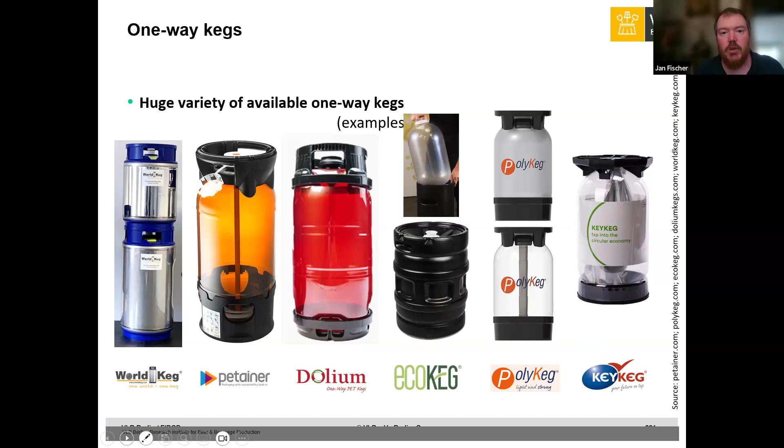Somebody who produces those will always say this is the way to go. However, from our experience, we made tests with those - not all, but with the big suppliers, I won't name them. We found that sensory-wise, within their shelf life, they perform as good as stainless steel. They have oxygen scavengers, and this one has the beer in an aluminum bag. Within that shelf life they're performing very good, so maybe in times of peaks, summer or so, this could be a way to use more, and they can be used within the normal equipment. Could be always a good alternative, I would say.

When using those kegs, please consider there is a danger because they are pressurized, up to 3 bar, what you are allowed to use. When they are empty but still pressurized and you pierce them, it can be very dangerous - we've seen them fly 20 meters up. So always release the pressure before opening or cutting them down for dumping. All of them have some devices to depressurize them - this one, for example, has at the coupler some pressure release. This is very important.

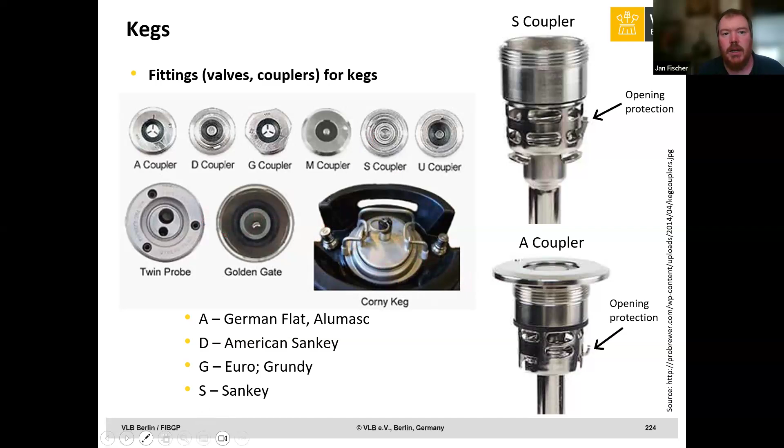Okay, here are the different couplers. I don't know what is common in Sweden, but in Germany nowadays we often have that flat one - it's good for micro breweries. For example there is the D, the American Sankey coupler, which is very common in the USA. You just need the right one and then you can use it. This is what I said, that Corny keg, the Cornelius keg, a soft drinks keg, where the fitting for gas and product is not the same - I have gas here and product here, or vice versa, and this one I can use easily. Here are those dispensing heads, couplers. I don't know if you know which one you need.

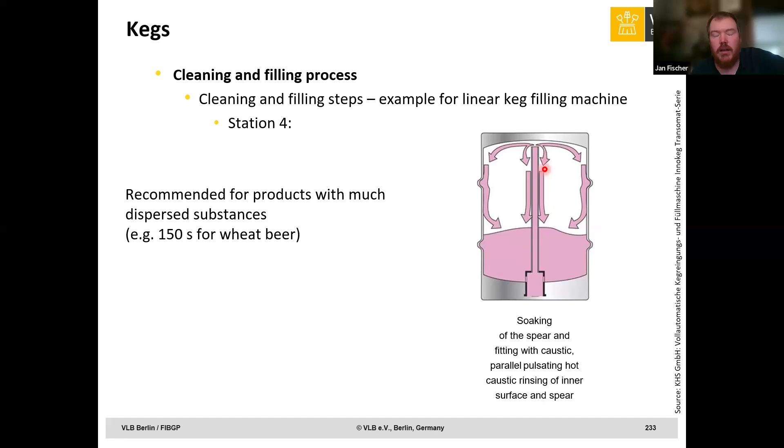For example, 150 seconds for wheat beer, where I might have more organic dirt. Soaking of the spear and fitting with caustic, parallel I can also make that pulsating and surface pumping, caustic pumping to have the cleaning.

If this is done, here's another third pulsating step. I remove that caustic with sterile air. Now water rinsing, and now I have an acid step. Acid, usually I don't use hot, it's always cold, and I make it to remove some inorganic stuff which could not be done by the caustic, but also to neutralize possible caustic. Caustic out, hot water rinsing.

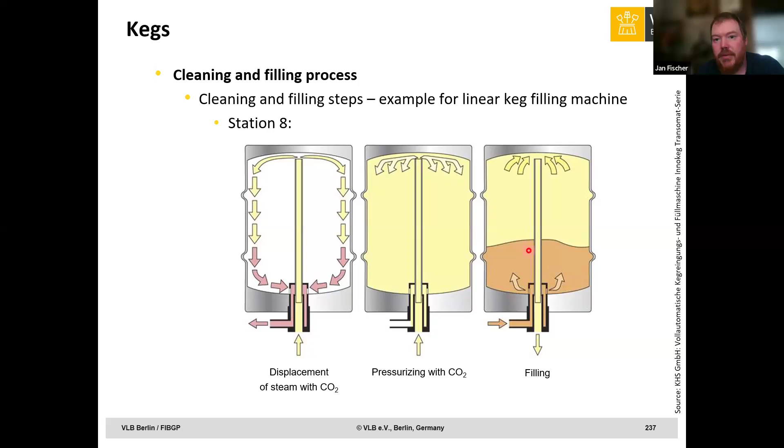That's it. Can you see this is a plastic cap? That is also nice, that you can see somehow what's happening. But here you see now the keg is filled with beer at a certain speed. Usually also those kegs, when you get them here, they come pre-pressurized.

And so we have the keg full of beer, and the people in the bar can enjoy it. We have a very easy way to check if the keg is right - to use the scale.

Here these are some palletizing, depalletizing of those soft drink kegs. I think it's then done here with this robot.

This is a quite modern way. I think it's not now relevant for all of us, but more and more, especially work where you have to lift heavy stuff, it's more and more done by those robots.

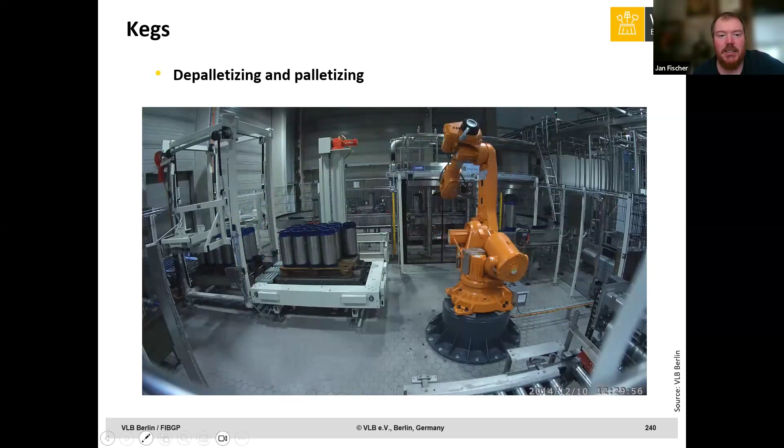I think it's getting time, but just very quickly, the labeling machines. After the filling machine, labeling - usually for beer bottles, glass bottles - the usual way is to have that wet cold labeling.

Traditionally, or always, it was done with casein as an adhesive, which was working very good. However, it's not vegan, and therefore, not only for this reason but also because of other things, more and more synthetic glues are now in the market.

So this is like the wet gluing - is there a picture of the machine? No, we'll see maybe later on. But we have those rollers also, and here this is the glue roller. As I said, it's a big roll, and it's like with that wet glue permanently floating with that glue, so we always have here a layer of glue.

The first step is that gluing pallet goes here at that station and takes the glue. So this thing is now full of glue, that pallet - I think we have here. Yes, this is the gluing pallet, and it goes there, and this thing is then full of glue.

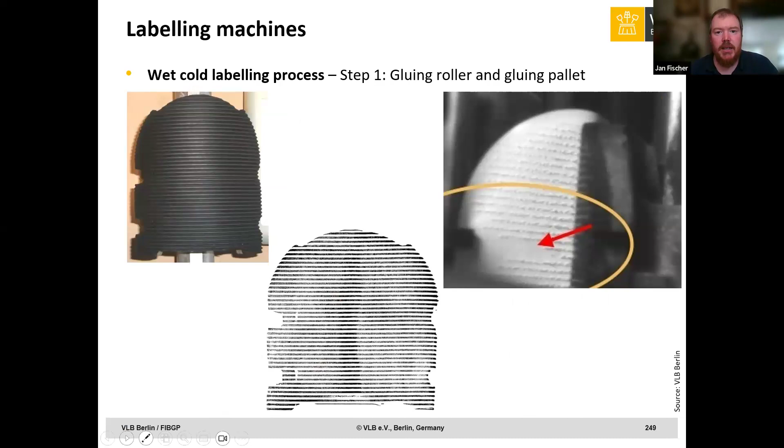It's a lamella, and then the second step is here, a label supply comes from the label box, they're all stacked together. And then this pallet with the glue goes here and takes the label. You see here, this is the front side of the label.

Next step is that gripping cylinder here, where then the labels are transferred - here gripped and transferred, these are now at those grippers. And then next step, the bottle comes, label goes to the bottle, and due to the glue, it stays there.

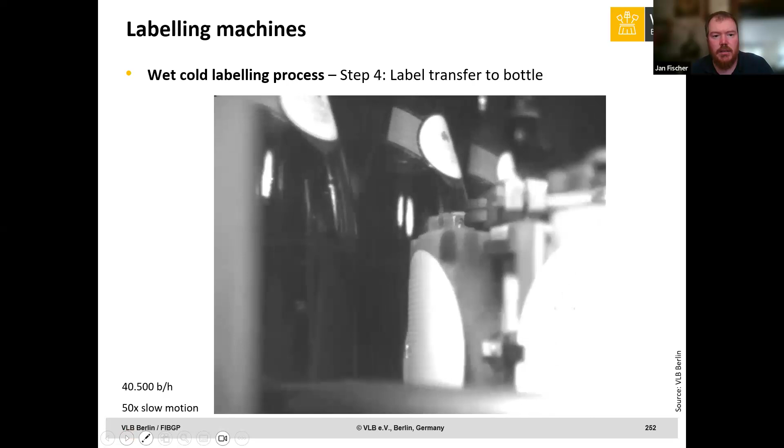The last step is that the labels are attached to the bottles with brushes. This might be interesting for small breweries and craft brewers - self-adhesive labels, like a sticker. This is often a source of frustration for small breweries when they use pool bottles shared among several breweries and put stickers on them, because with a normal bottle cleaning machine you cannot remove them. So for returnable bottles you need a special cleaning agent, which is used for that, but it's often also used for one-way bottles.

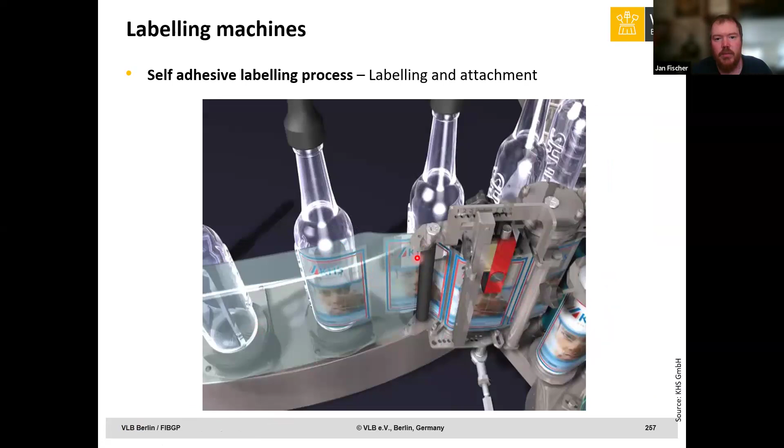Of course, the bottles have to be dry. You can see here, though the video doesn't work, how this is implemented - the machine is much easier because you already have the glue on the sticker. Here's the label, and it's put to the bottle, then at the guiding rail it is glued and fixed.

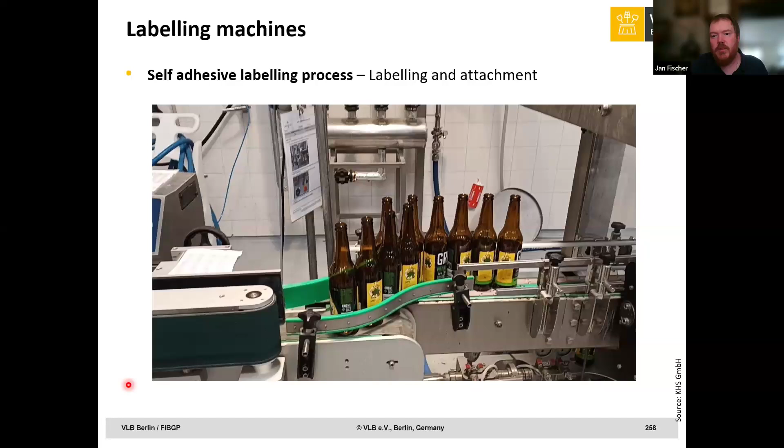I don't know, actually this was a video - oh yeah. Here's like a semi-automatic machine, the bottles are still put in manually, but you can see how it's done on a very small scale. You have the labels here, and they are applied to the bottle. So that's something with self-adhesive labels that could also be interesting, especially for small breweries.

I don't know, about 10 years ago it started with direct printing on the container - of course you can buy it from the manufacturer already direct printed, but I think this wasn't so big nowadays. There are machines which print the label directly on the bottles, but I never saw that in real life, only in presentations and at some trade fairs.